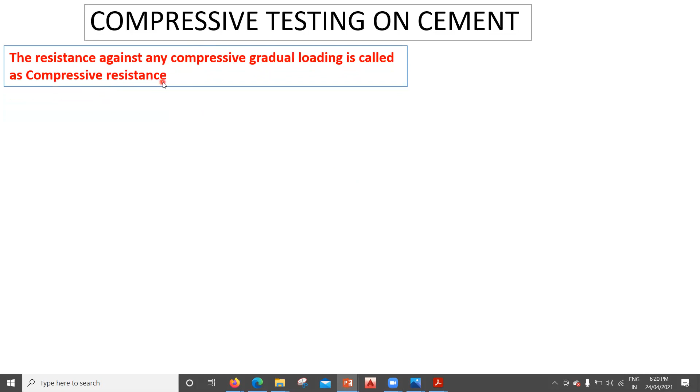So before we begin with the compressive testing of cement, we need to understand what this compressive force is and how it's going to act. The resistance against any compressive gradual loading is called compressive resistance, right? So let us say this is a specimen I have, and if I'm trying to apply a load from both directions in this way, this is my compressive force, right?

So the compression force is that force which tries to squeeze the material together, or the pushing force applied on two faces of the specimen; we call this a compressive force. In the same way, if I try to reverse the force, instead of putting a compressive force, if I put a force in the opposite direction, something like this, then this is called a tensile force.

And one thing we need to understand: cement or concrete is not strong in tension, it is strong in compression. That is why whenever we do a test, we get more compressive force in comparison to tensile force, right? In technical terms, compressive strength of cement means the ability of the cement specimen to resist compressive stress when tested under the compressive testing machine at the end of 28 days.

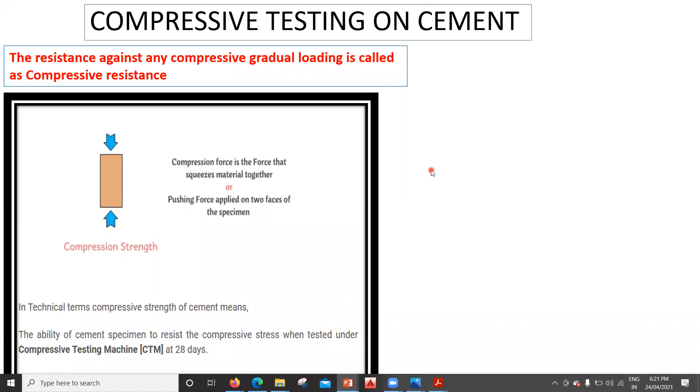So we'll see what equipment we require for conducting this particular test. The apparatus required: first is a compressive testing machine. Then we require a steel cube. This is the steel cube we have, and its size is 7.06 by 7.06 for the length and breadth, and the height is also 7.06 centimeter.

Then we require a trowel to mix the cement paste, and a non-porous plate. A vibrator machine is also required so that all the cement paste goes exactly into the mold and there won't be any voids. Then we require a graduated cylinder, a weighing balance, cement, and obviously water.

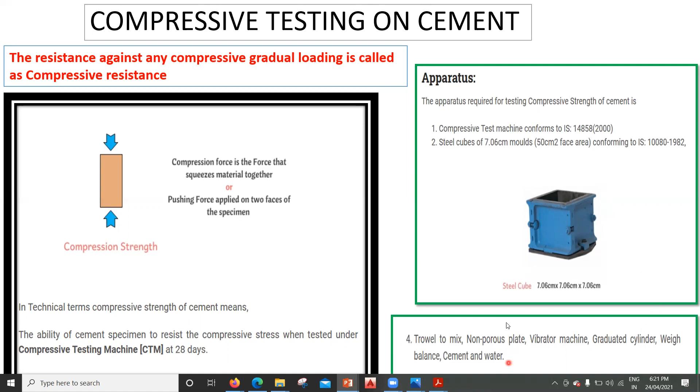Now we'll see the procedure. I'll be explaining two different procedures so that it is easy for us to choose whichever is required. So we'll start. The first thing is that we have to clean the apparatus.

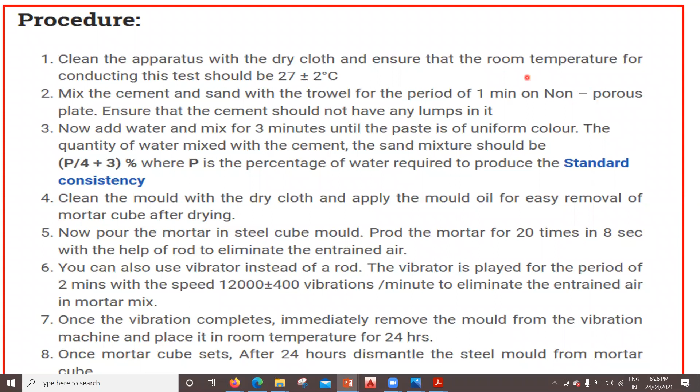So this curing is done so that if you don't do the curing, whatever water we have added into the cement paste will get evaporated. So I don't want that evaporation to happen. So that is why I try to immerse this into the water. So there won't be evaporation from the cement paste or from the cement what we have added.

So after that, as mentioned, the specimen must be kept in water for 7 or 14 or 28 days, and for every 7 days the water is changed. So if you want, you can change the water, otherwise it's okay. So test the 3 cubes on 7th day, and once this is done, we are going to do the testing of this. So on how many days we are going to do the testing? On 7th day we are going to do the testing of this, then on 14th day, and then on 28th day we are going to do the testing.

So the testing specimens are placed in the space between the bearing surfaces of the compressive strength machine. I'll be showing you this compressive testing machine, and care must be taken to prevent the existence of any loose material or grit on the metal plates of the machine or the specimen block.

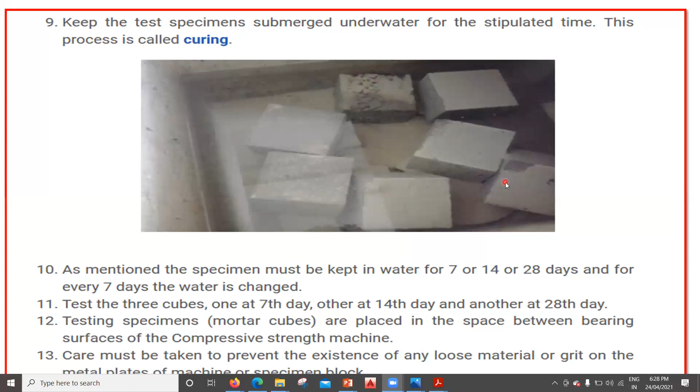Now coming to the loading application. The load must be applied axially, that means vertically on the specimen without any shock, and increased at a rate of 35 N/mm² per minute till the specimen collapses. Due to the constant application of load on the face of the cube, the mortar cube starts cracking and fails at a point. As you keep increasing the load, at one stage there will be a crack and slowly it's going to fail. Then we note down the reading from the dial gauge of the compressive testing machine where the specimen starts failing.

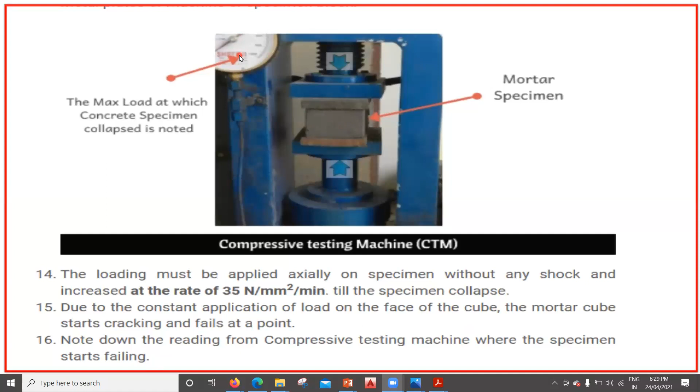Once we get the reading, what is the next step? The next step is very simple. The compressive strength of the cement mortar, it's not concrete, you can write it here as cement mortar, is equal to the maximum load carried by the specimen divided by the top surface area of the specimen.

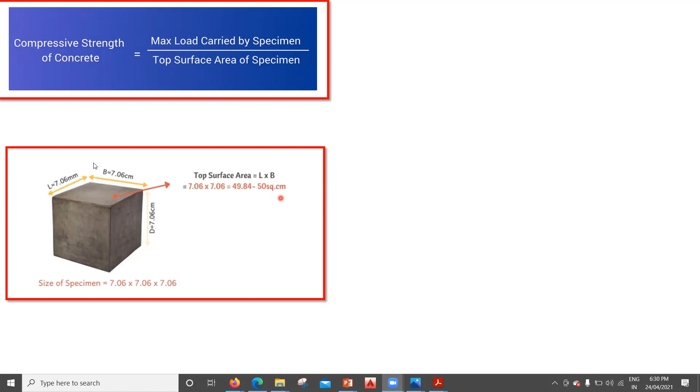What is the top surface area of the specimen? This is how the mold looks: 7.06 by 7.06 by 7.06 cm. The top surface area is length into breadth, 7.06 into 7.06, which comes out to be 49.84, say 50 square centimeters. Now we make a chart: age of the cube, surface area of the cube, maximum load at which it breaks, then the compressive strength and the average compressive strength.

We are going to do the testing three times: on the 7th day, the 14th day, and the 28th day. The 7 days and 14 days strength we do to get an idea whether on 28 days we are going to get the proper strength or not. But what we consider for our calculation is the 28 days strength, which is important for us.

Coming to the result part, this is how the results have to be written. The average compressive strength of the cement cube at 7 days is so and so, at 14 days is so and so, and at the end of 28 days it is so and so. Right now we saw a very elaborate explanation. Now we'll see it in a better way; quickly I'll go through that.

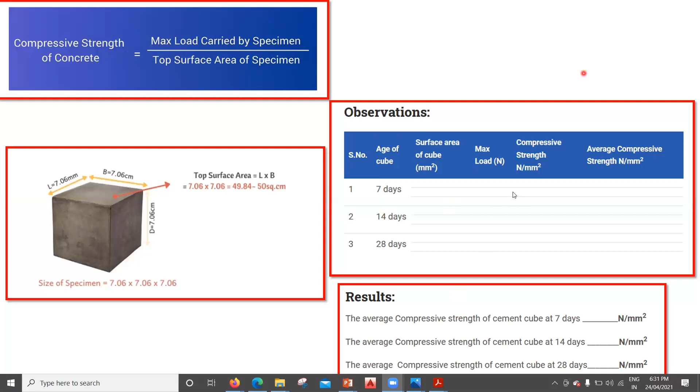So you can make use of this and you can understand this in a better way. So the aim of the experiment, we know, is to determine the compressive strength of the given sample. The apparatus is so and so. So the procedure: we have to take cement and sand in the ratio of 1:3. This thing I did not explain. So the cement and sand has to be taken in the ratio of 1:3.

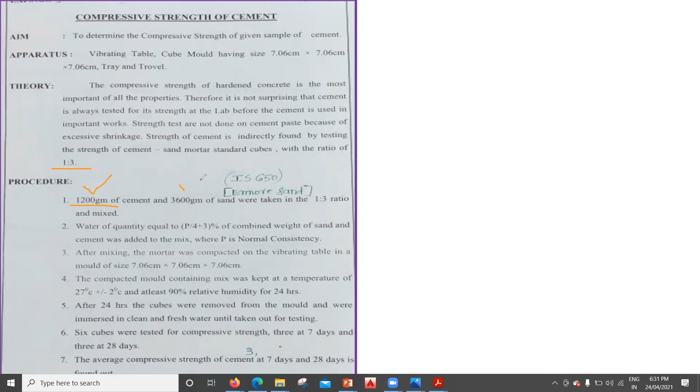That means if you're taking 1200 gram of cement, what is three times that? Three times that is 3600. So 1200 gram of cement and 3600 gram of sand has to be taken in the ratio of 1:3. And the sand you have to take is actually Ennore sand. Ennore is a place in Tamil Nadu, and according to that we have done all these tests. But if you don't get that sand, the sand you get locally is also okay, but we should make sure it meets the requirement of the Ennore sand.

The second is that a quantity of water equal to P/4 plus 3% of the combined weight of cement and sand was added to the mix, where P is the normal consistency. After mixing, the mortar was compacted on the vibrating table in a mold of size 7.06 by 7.06 by 7.06 centimeter, and then the compacted mold containing the mix was kept at a temperature of so and so. This is not so important. It's okay if you try to keep it at normal temperature.

After 24 hours, the cubes were removed from the mold and immersed in clean, fresh water until taken out for testing. Cubes were tested for compressive strength at 3 days, 7 days, and at the end of 28 days, and according to that, the average compressive strength of cement at 3 days, 7 days, and 28 days is found. That means at the end of 3 days I require three samples, at the end of 7 days three samples, and at the end of 28 days three samples. Altogether I need to cast nine such cubes so that my testing will be done properly, right?

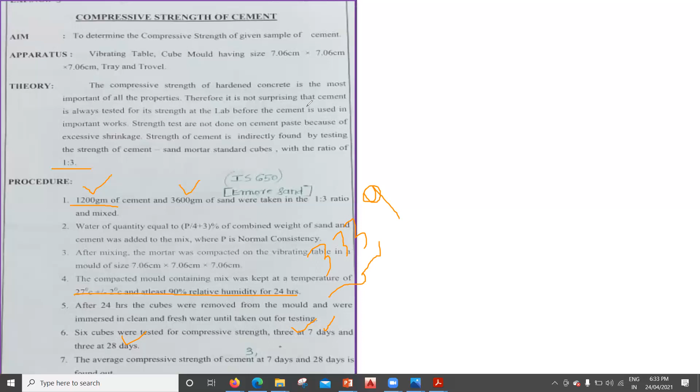Yeah. So coming to the result part again. Coming to the observation, what is the weight of cement we had taken? 1200 gram. Weight of sand we had taken? 3600 gram. Amount of water will be P/4 plus 3%. If you do this, you will get 576 ml. Now this is how it is applied. See, this is the load we have got, 11.5, into this conversion factor from kilonewton, and this is the cross-sectional area, and this is the compressive strength. This 23.02 you are getting from the compression testing machine.

So at the end of 7 days we have taken 3 cubes and done the testing, giving 23.02, 25.03, and 20.02. The average of this comes out to be 22.69. Similarly, at the end of 28 days we got 37.04, 35.04, and 38.04. Take an average of this, you are going to get 36.70. So in this way we need to do the test.

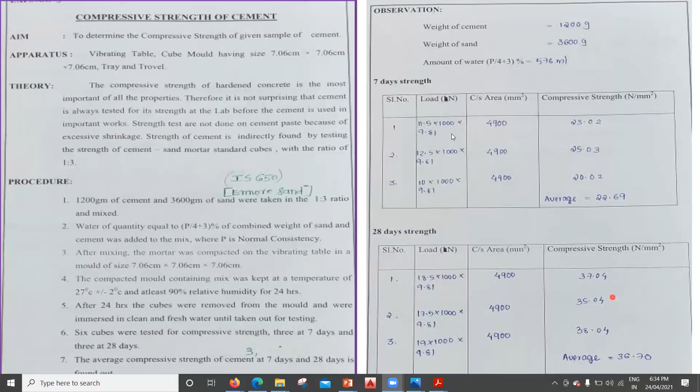Now coming to the conclusion part: the average compressive strength of cement at the end of 7 days is 22.69 and at the end of 28 days is 36.70. Now to get a rough idea, in order to get the 7-day strength, what is the formula that we can use? The formula we can use is 2/3. Let us say we have different grades of cement, right?

That is 33 grade cement, we have 43 grade cement, and we have 53 grade cement. Right now whatever I'm explaining, it is for 33 grade cement. So let us say at the end of 7 days, how much minimum strength do you require? We have a certain formula. The formula is 2/3 of the grade of the cement. Let us say I'm making use of 33 grade cement. What is 2/3 of that? If I do 2/3 of 33, I should get 22 megapascal or Newton per mm square.

So this much minimum strength I need to get, and how much did I get? I got 22.69, which is greater than 22. That means whatever calculation I have done and whatever mold I have prepared, that is correct. In the same way, at the end of 28 days, you should get more than 33 Newton per mm square. So we are getting more than 33, we are getting 36.70.

In the same way, at the end of 3 days, how much do you have to get? You have to get half of that. That is half of 33. Half of 33 comes out to be 16 MPa. So we are getting 16 MPa. So in this way, you have to conduct all the tests, right?

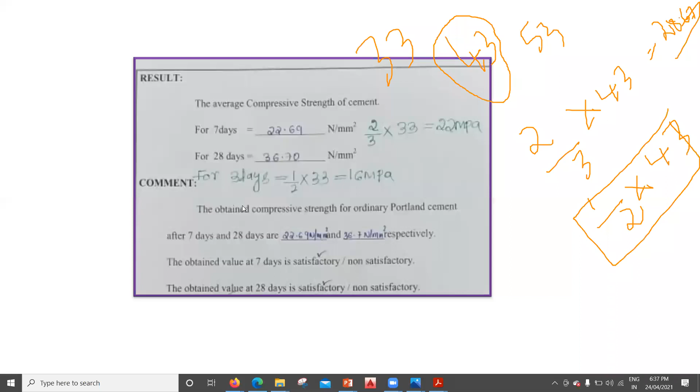Yeah. So now coming to the last part of this. Whatever we have done so far, there are different grades of cement, right? We have 33, 43, and 53. So what changes will happen in 33, 43, and 53? The first change is the fineness. The 33 grade cement is less fine in comparison to the 43 grade cement, and 43 grade cement is less fine in comparison to 53 grade cement.

The second is the tricalcium silicate content. The tricalcium silicate content is less here, so the strength gain is also less. But in 43 grade cement, the tricalcium silicate is more in comparison to 33 grade cement. So that is the reason 43 grade cement will get more strength. And 53 grade cement will have more tricalcium silicate content in comparison to 43 and 33. That is the reason we get more strength in 53 grade cement.

So the main difference between 33, 43, and 53 grade cement is the fineness, because we have already seen that if the fineness is more, it is going to gain more strength and fewer voids will be there. And also the tricalcium silicate helps in giving the strength. If you increase the tricalcium silicate content, the strength is also going to increase. So this is the major difference between the 33, 43, and 53 grade cement. But the compressive strength test will remain the same; we only need to understand how this has to be done.